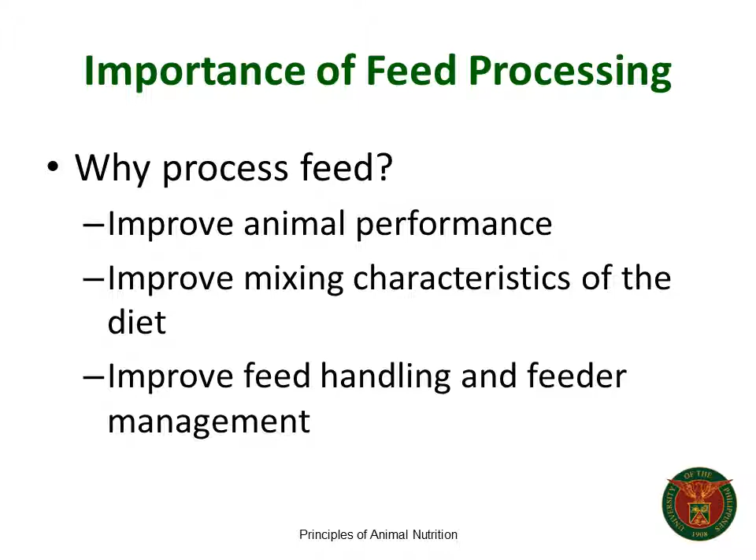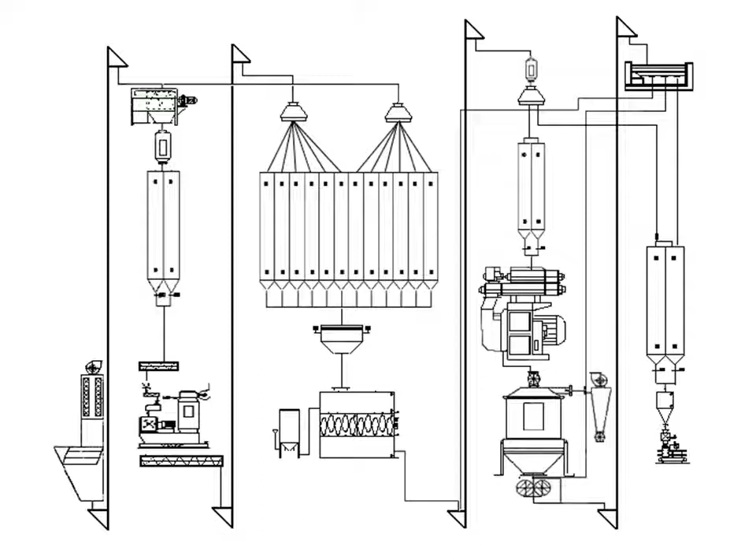In this process, from bagging, from the intake of delivered ingredients to grinding, mixing, pelleting, and bagging, we'll talk about three areas or processing methods that have the biggest impact on the quality of feed: particle size reduction, mixing, and pelleting and conditioning. So we will focus on those three matters. The first we'll talk about is particle size reduction, or grinding.

So why is it important that we reduce particle size? I mentioned it a little bit on the importance of feed processing. There are four reasons or four benefits of reducing particle size. One, it increases or improves feed digestion, or digestibility of the feed.

As I mentioned, if you use whole corn, most definitely the animal will not be able to digest the corn completely, because a big portion of the corn is within the hull. And there is only a specific amount of time that the feed will pass through the digestive tract. So there's time limitation, limitation in terms of access to digestion, and that overall will reduce feed digestibility.

Reducing the particle size, or grinding the material, the corn in this example, will increase the surface area for digestion and lead to better digestibility of nutrients. The animals can then get more energy, more amino acids, more nutrients in general from the material. The second benefit is it improves the binding ability between particles. I mentioned pelleting a while ago.

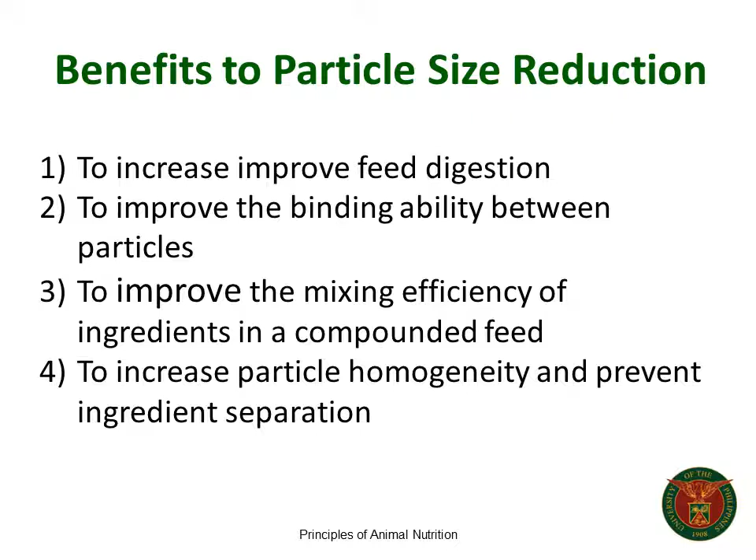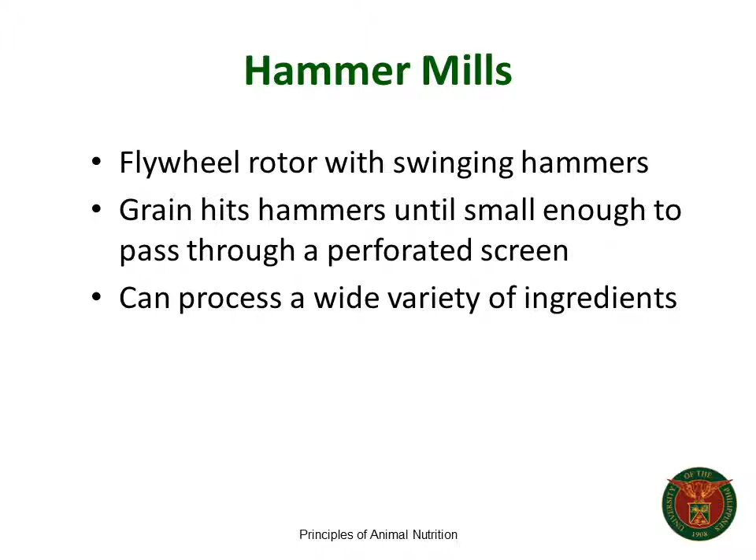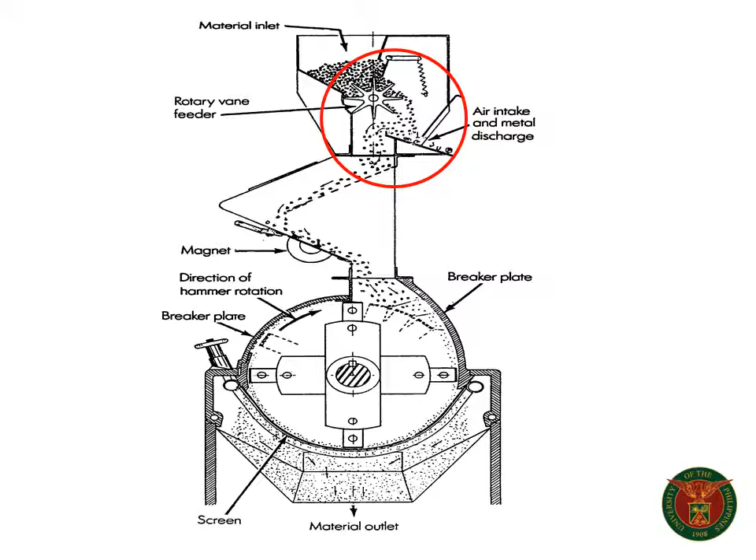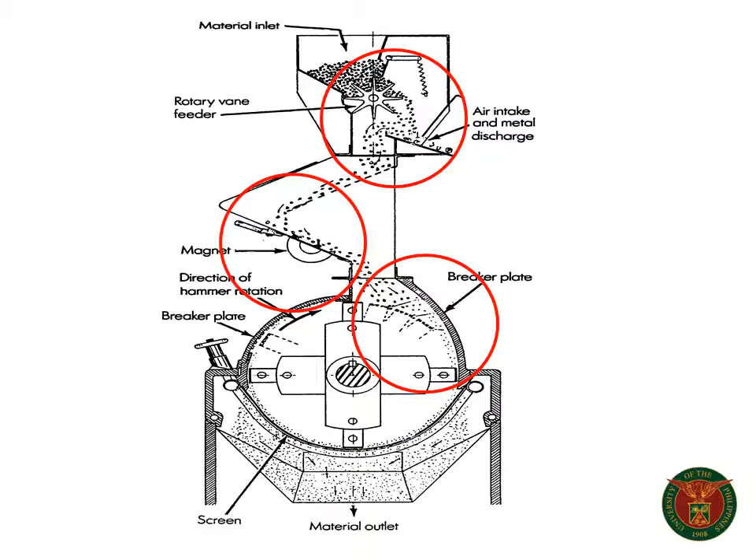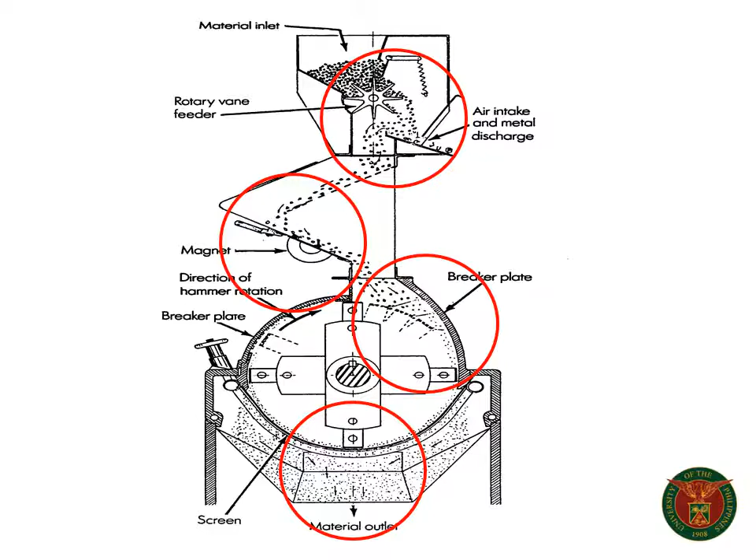In general, this is what happens: the material is placed into the inlet, comes in, and passes through the discharge. Along the line there is a magnet to prevent any metal from continuing into the grinding part of the equipment, which increases the life of the equipment. As the material comes in, the flywheel rotor is rotating and the hammers hit the material against the breaker plate, shattering it into smaller pieces. The particles flow out through the screen into the material outlet, ensuring the particles are of the correct particle size - a very basic principle.

The other type of grinding equipment is called the roller mill. Just like the hammer mill, it's named for how it grinds the material - by rolling. It's used for rolling, cracking, flaking, and steam flaking grains, and those materials are used for ruminant diets. The grain passes between two rotating cylinders, where we can adjust the distance, or roller gap, and the speed of rotation. This is how engineers control the particle size that comes out of the roller mill - the speed of the rolls determines the size and shape of the particle.

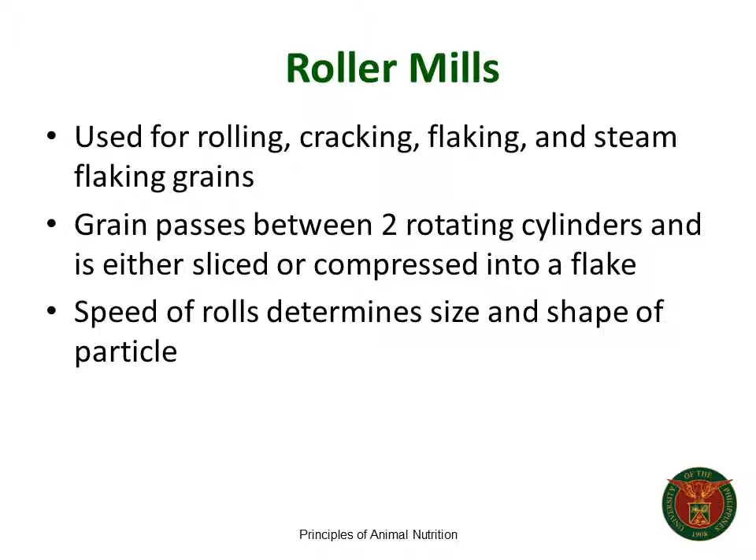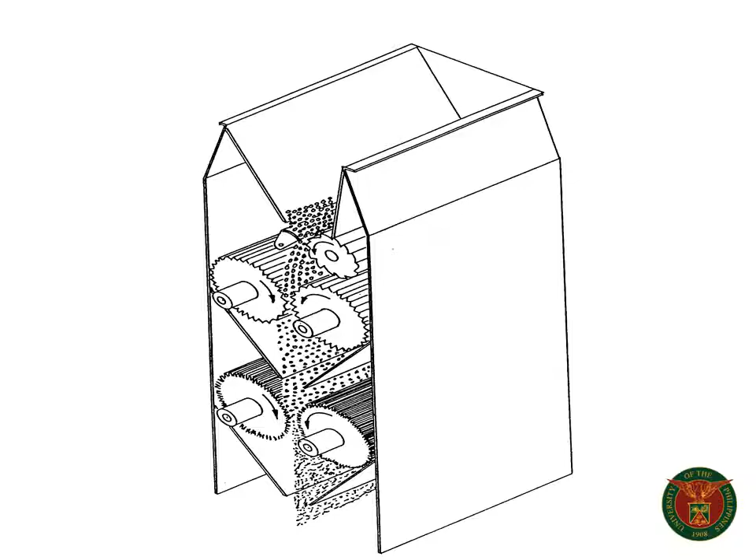One of the advantages of the roller mill is that it can grind very small particles, like sorghum, which has a very small particle size—like a mung bean in size, or even smaller. Usually when we grind sorghum in hammer mills, it's very difficult to grind, so you end up with whole grains of sorghum. But in roller mills, even the small grains can be ground easily. So that's the advantage of the roller mill versus the hammer mill—it has more flexibility in the type of ingredients that can be ground.

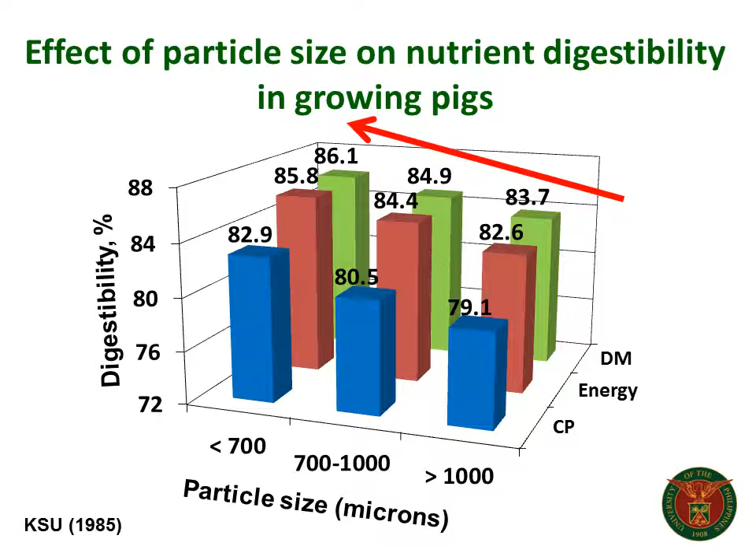The next question is, how do we check for particle size? There is a method called the particle size test, using a set of sieves with different perforated screens or sizes of perforated screens, and inside the sieves you would have agitators or dispersing agents.

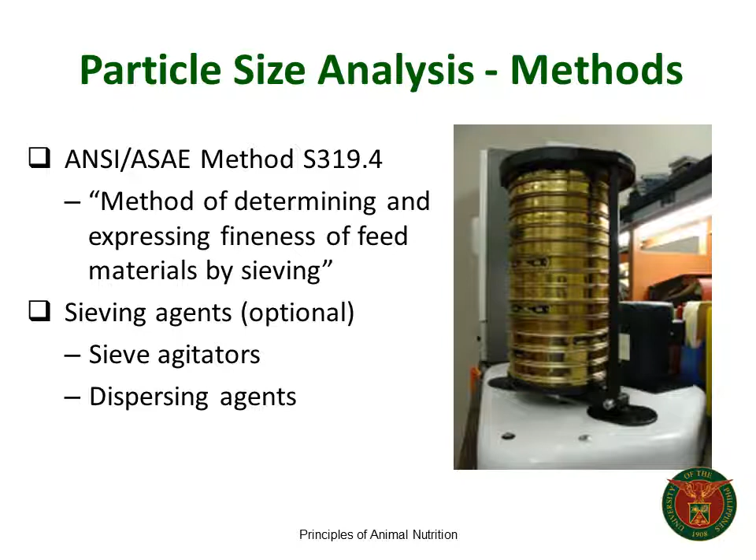This particular method is called the Rotap method, because the set of sieves are placed into a Rotap shaker, as you see in the figure. The shaker rotates the pans for 10 minutes, and on top of the pan is a part of the equipment that taps downwards, enabling the material to be tapped and flow through the set of sieves. After 10 minutes they stop the machine, take the pans, and weigh the feed or material left in each pan.

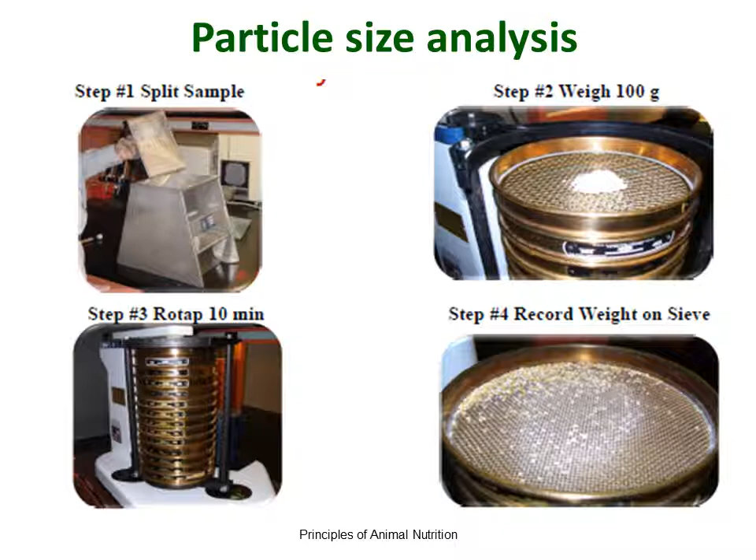So this is what I was describing: you get a sample of the ground material, put 100 grams on the top sieve, close the machine, and put it in the Rotap for 10 minutes. It rotates while being tapped on top, and at the end of 10 minutes we take the material left in each sieve and weigh it.

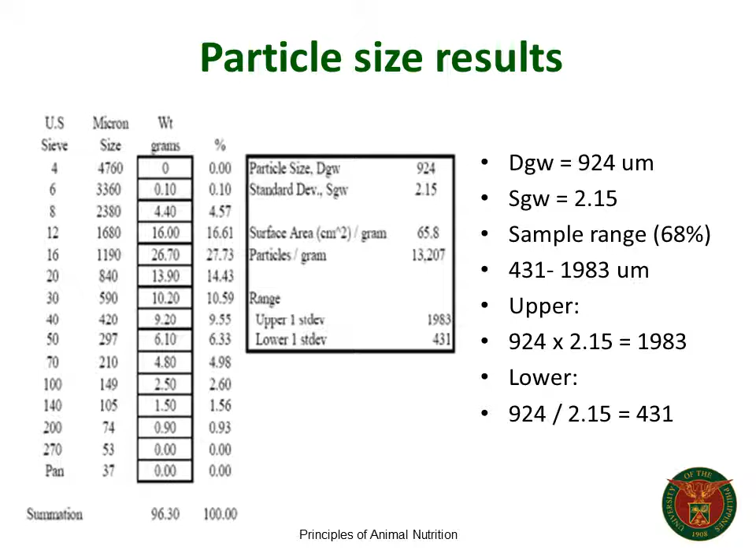And then for wheat, again, there's not a lot of data for sows, layers, and broilers, although there is some work in broilers that recommends wheat be fed to broilers or even layers as whole wheat. That is again related to gizzard size. And for growing pigs, it's between 600 to 800 microns.

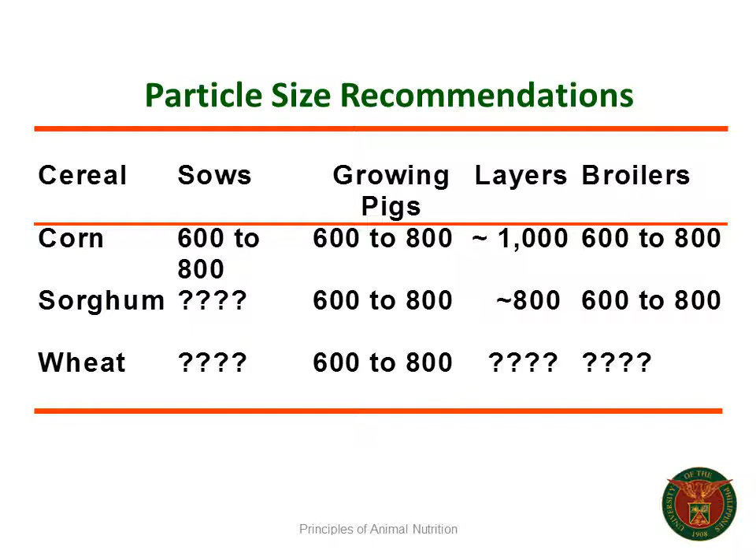So what are the benefits of a consistent particle size? One, there's less feeder bridging and plugging. Later I'll show you some pictures of what that means. In commercial farms that use automatic feeders, that would mean fewer feed lines that are plugged, because if the feed lines are plugged, feed will not flow through the lines, and the feeders at the end of the line would be empty, which can lead to out-of-feed events.

There will be fewer ulcer outbreaks in pigs. Gastric ulcers are a problem, particularly for fine ground meal. If the feed is too fine, it can lead to greater incidences of gastric ulcers. When there is a gastric ulcer, there is blood in the stomach, and the animal will actually die because of hemorrhage. When you open these pigs that have ulcers, you'll see their stomachs full of blood. Usually it's the larger pigs or the faster growing pigs in the group that will be affected.

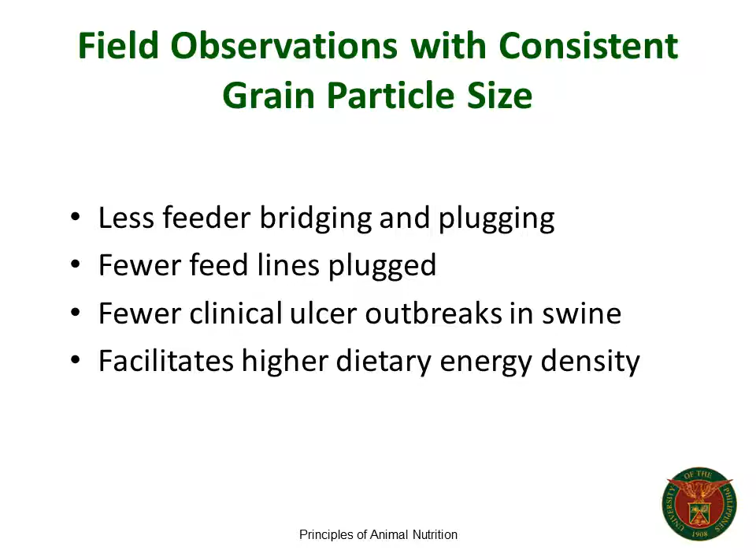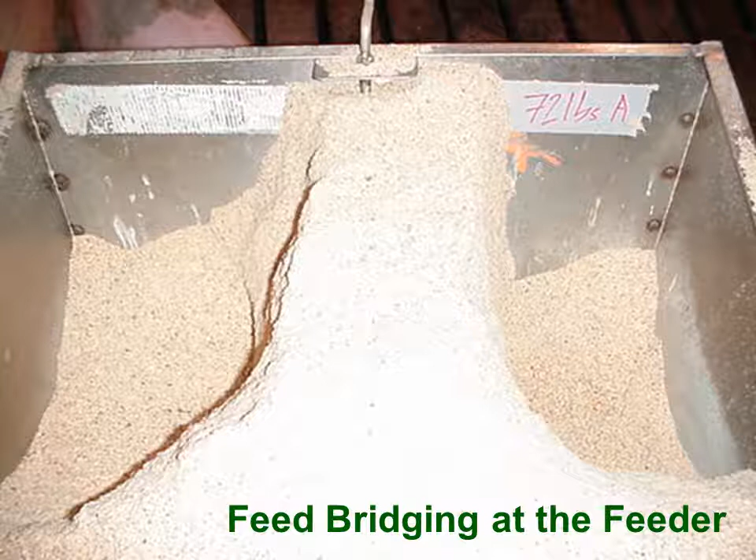Then this is a picture of feed bridging. This is already at the feeder. If the particle size is inconsistent, you see this feed bridging, and when there is feed bridging, there is ingredient separation. As you could see, in the middle there is the bridge, and usually what is left in the middle would be the fine materials, the finer ingredients, meaning the mix that comes out of the pan of the feeder is not uniform, which can have negative impacts on performance.

And then the worst part is if there is feed bridging, or plugging along the lines, then out-of-feed events can happen. By the term out of feed, it means the feeders are empty, and when the farmer finds out that it is empty, they will fix the problem, and suddenly feed will flow out of the feeders. But because pigs did not eat for quite some time, they will rush into the feeder and fight over the feed, which creates stress, and that stress leads to negative effects on performance. So welfare issues and even performance effects have been shown when there is a high incidence of out-of-feed events.

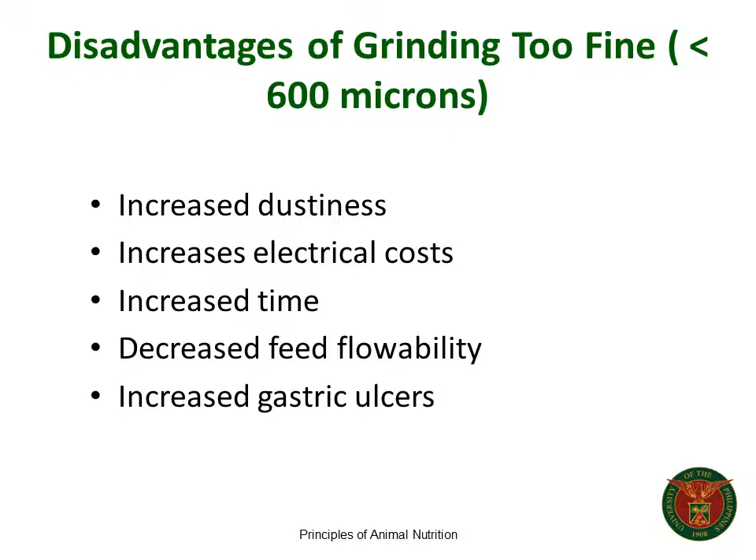What I mentioned is demonstrated by this study by Wondra in the late 1990s. On the x-axis is the particle size of the feed, from 1000 to 400 microns. And then you have energy consumption in kilowatt hour per ton on the y-axis, as well as production rate, which is tons of feed per hour of production.

As you could see, as particle size decreases from 1000 to 600 microns, energy consumption increases. And when you grind from 600 to 400 microns, you see a big increase, actually a doubling of the energy consumption, from 4 kilowatt hour per ton to 8 kilowatt hour per ton. At the same time, you see production rate at around close to 3 tons per hour.

When you grind finer, from 600 to 400 microns, you see a significant decrease in production rate, from close to 3 tons per hour to a little over 1 ton per hour. So those are the issues when we grind feed too fine.

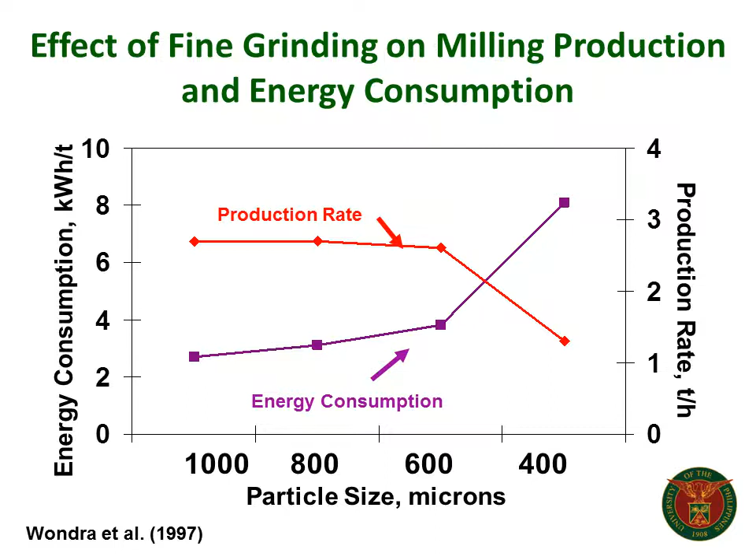Okay, so the next processing topic would be mixing. So what is our goal when we mix feed?

Here is a figure that describes the types of mixes. You have a perfect mix on the left, like a chessboard. Then you have a random mix, with no order. And then you have a segregated mix, where you have more white squares on the top than on the bottom.

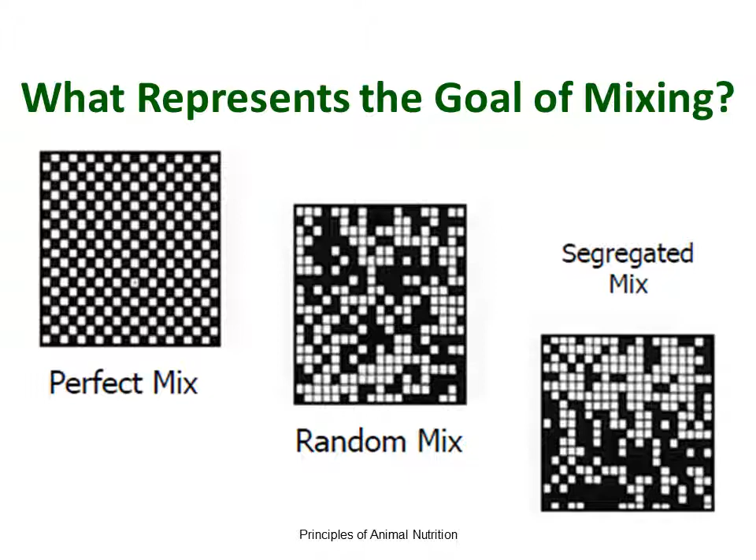So what is our goal? Our goal is to have a perfect mix. We want to get it as close to a perfect mix as possible.

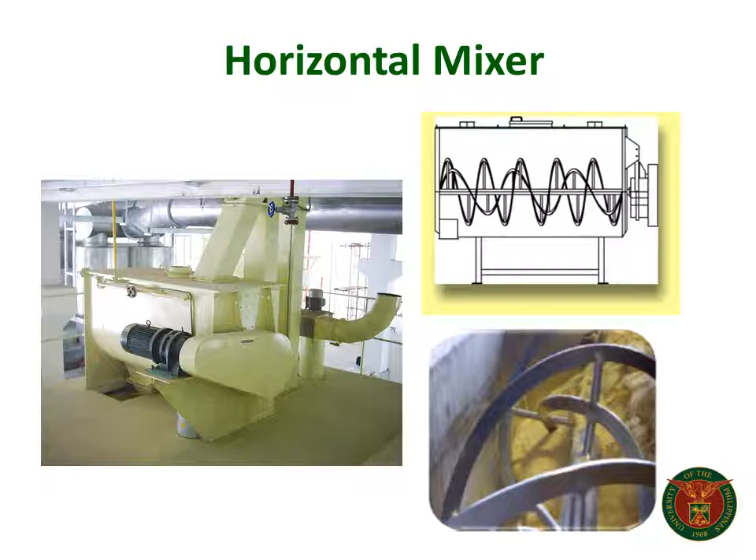There are two types of mixing equipment used in the feed industry. The most common one is called the horizontal mixer. In this figure, you see an example of a horizontal mixer. Inside that horizontal mixer is a rotor, and around the rotor are ribbons, so this is an example of a ribbon type mixer. This rotor would rotate, and that would mix the feed horizontally inside the mixer.

So what is the advantage of a horizontal mixer? Our goal is a uniform mix, and the measure of uniformity is the coefficient of variation, or CV. As you could see in this figure, you have the mixing time on the x-axis and the percent CV on the y-axis, for a double ribbon horizontal mixer.

Our goal is to get the CV of the mix to around 10%. When it's 10% and below, that's a uniform mix. For our double ribbon horizontal mixer, it takes about 2.5 minutes to get to 10% CV, which is pretty good. Then we add half a minute to 3 minutes, and that will give us a CV of around 5%.

Beyond 3 minutes, there is no further improvement in CV. This means there is no such thing as over mixing, that if you mix beyond the correct time it will go back to a higher CV - that's not true, it will just stay that way. But mixing longer takes more time and spends more electricity. That's why we mix at the appropriate mixing time.

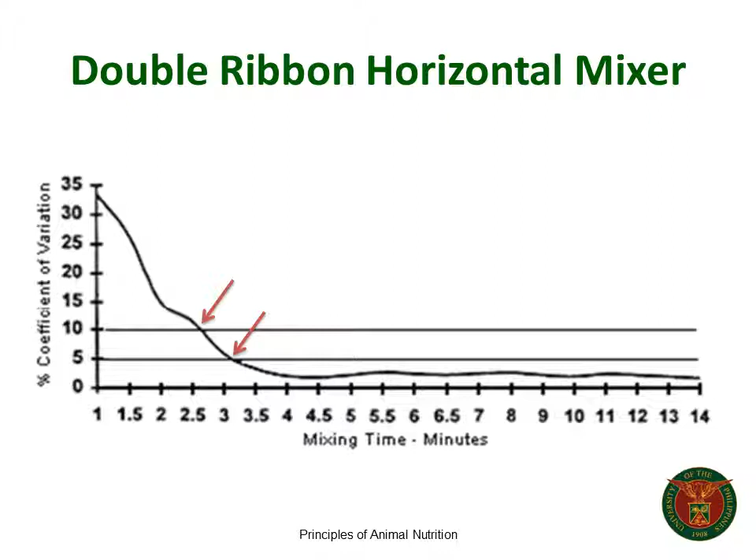The second type of mixer is the vertical mixer. Unlike the horizontal mixer, it mixes the feed vertically, which is why it's called a vertical mixer.

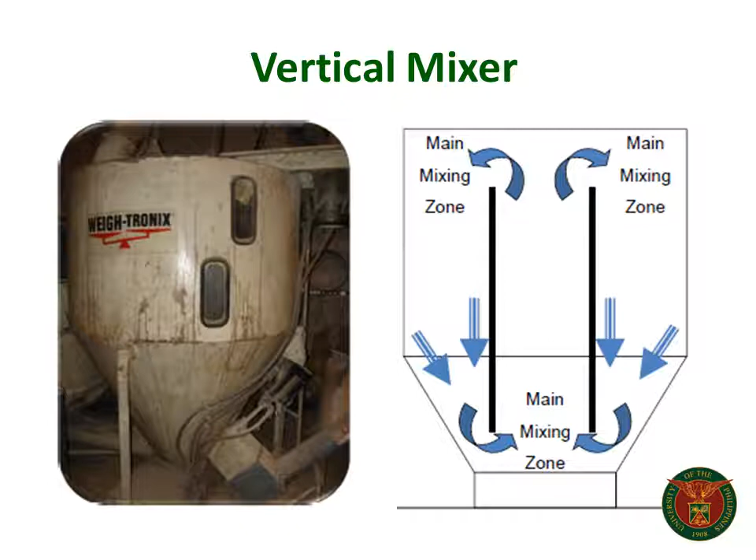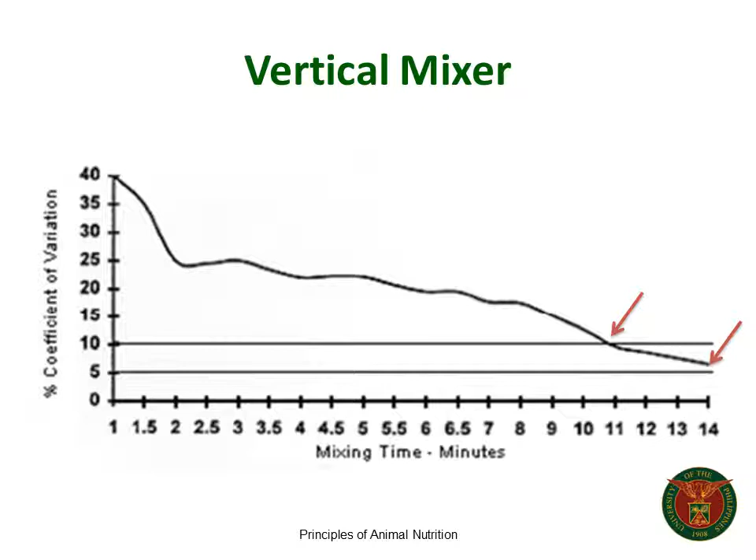There are some mixer problems to consider. One issue is liquids, which are added into the mixer through spray nozzles. If a spray nozzle is covered by feed, the liquid—usually oil, which is an energy source, or methionine—may not spray properly, affecting the quality of the diet. We have to ensure periodically that the liquid spray nozzles are not covered with material.

Another problem is material buildup in the blades. If a lot of material or feed gets stuck in the blades, that can also affect the uniformity of the mix.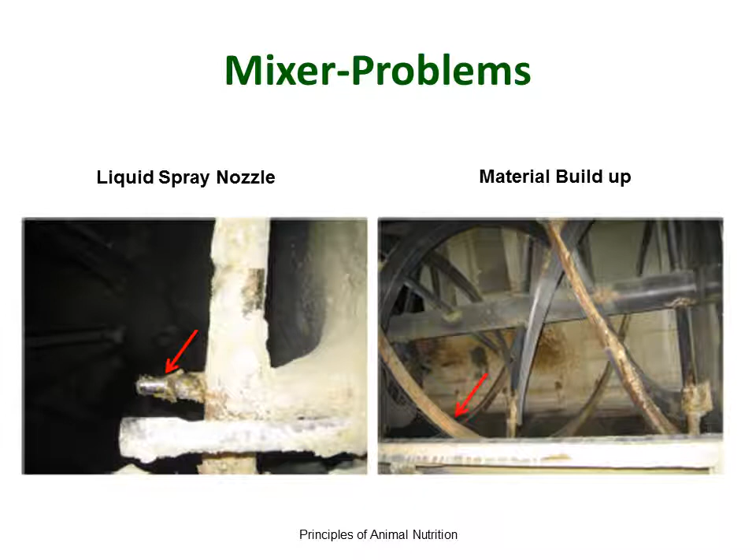Some other problems are materials building up on the ribbons, which happens when we mix liquids like oils improperly. That means if we're expecting 1,000 tons of feed, we most likely won't get the full 1,000 tons, because a significant portion is left stuck on the ribbons. This has to be cleaned periodically to prevent material buildup.

As in the picture on the right, material is left on the paddles because liquids get onto the paddles and the axle. When that happens, material gets stuck on the paddles, which prevents it from being mixed into the rest of the feed.

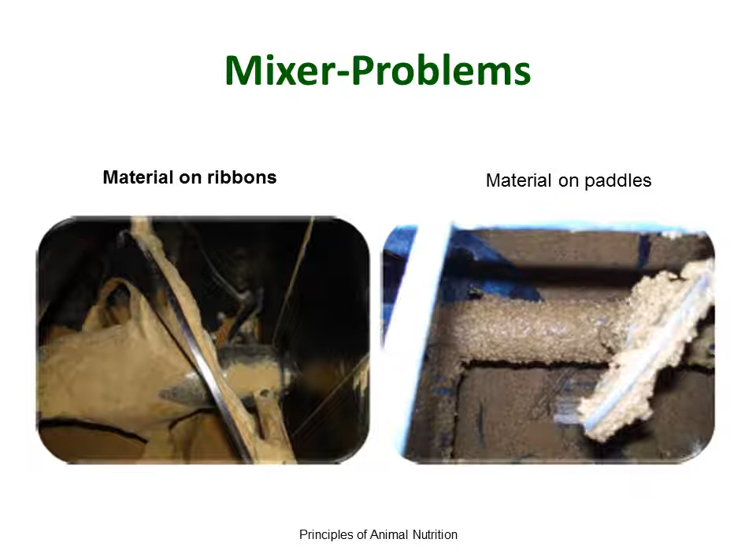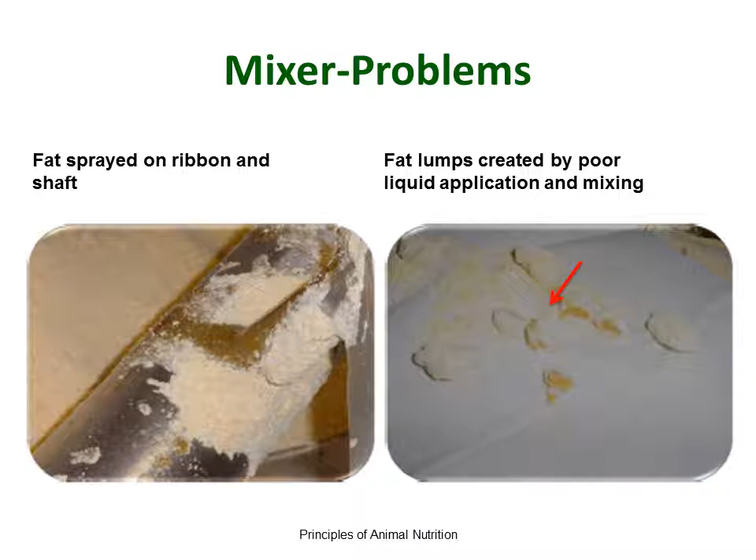Another problem is the formation of fat lumps. When you look at a mix of feed and see balls of fat, that means the fat is not properly mixed into the feed, which again affects the uniformity of the mix.

So how do we test for the uniformity of the mix? We do that through a mixer performance test, which is part of feed quality assurance. How often this is done depends on the feed mill—some do it more regularly, some every 6 months, some once a year—but obviously the more regular, the better.

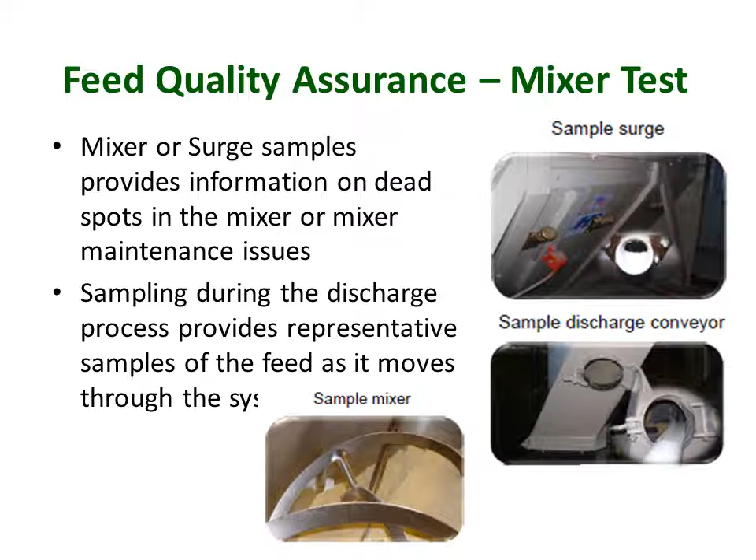To check mixer performance, they get samples of feed, usually 10 samples, either from different areas of the mixer or as feed comes out of the mixer, taking 10 samples from different bags. Those samples are then analyzed for salt or a marker.

The way they will do it is they will calculate the mixer CV. They will analyze for, let's say, salt, all the 10 samples, and then they will calculate the standard deviation, divide it by the average percent salt times 100, and they get the percent CV.

Why salt? Salt is usually selected because it's one of the micro ingredients. Its inclusion in the feed is not very high, but also not very low. So if the CV of the salt is good, then we assume that the CV of all the ingredients is also very good.

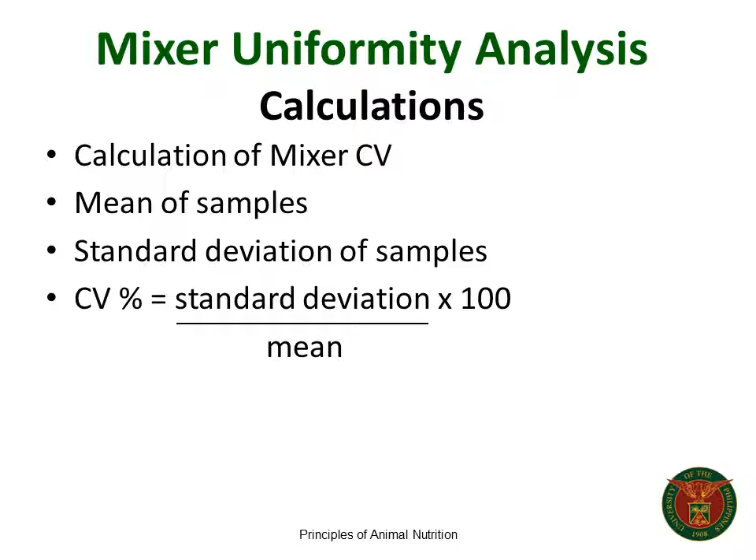So once we know the CV, we then compare it to a standard. By the way, this is an example.

Here, instead of salt, they use a marker called a Quantab, and they analyze the Quantab for the 10 samples. The reason why they use these markers is because the added salt in the feed is not the only source of salt. If you have ingredients like animal protein sources or fish meal, they can contain salt as well, and that can add to the variation. As an alternative, they use other markers like Quantab.

In this example, you see they measure the standard deviation, which is 0.02, the mean Quantab reading is 0.19, and then the CV is 9.65.

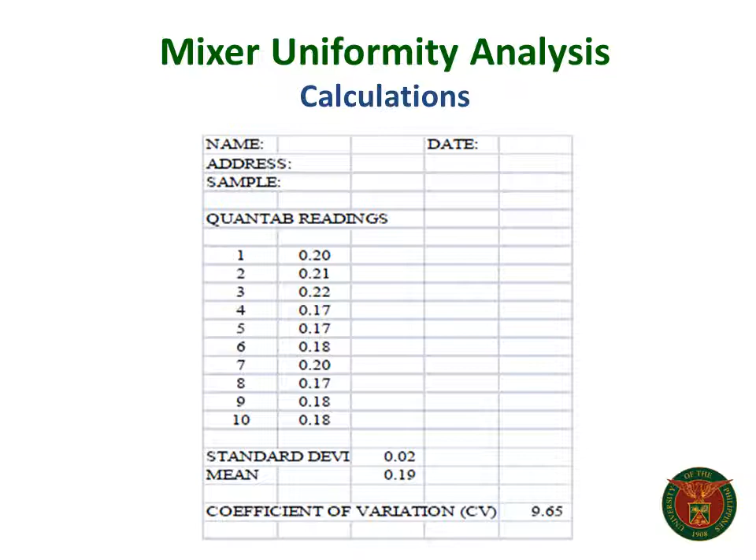So what is the standard? As I already indicated earlier, it's 10%. So 10% and below, that's excellent mixer uniformity, meaning no corrective action needs to be done. But if the CV is 10 to 15%, it is good, but that also means we need to increase mixing time by around 25 to 30%, so that hopefully that can bring down the CV to 10% and below.

If the CV is 15 to 20%, then the rating is fair, and the corrective action would be to increase mixing time by 50%. So if I'm mixing 2 minutes, then I'll mix 3 minutes. And then I'll start looking at the equipment, maybe worn equipment, maybe the blades, maybe the paddles, maybe we are overfilling the mixer.

Overfilling means putting feed above the capacity, so if it's a ton of feed, then it's putting more than a ton of feed. Another problem would be underfilling, meaning using a large mixer for a small batch of feed. The standard is it should be between 50 to 80% of the capacity of the mixer.

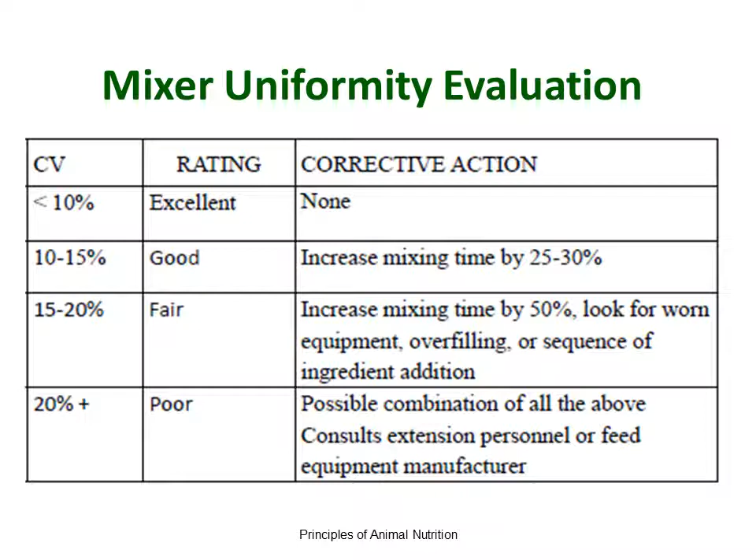The third aspect of processing we'll discuss would be conditioning and pelleting. So what is conditioning? The objective of conditioning is to improve the pelleting of the material, and we do that by including or injecting steam into the material so that moisture would be absorbed, which would then gelatinize some of the starches in the material, improving the binding ability of those pellets.

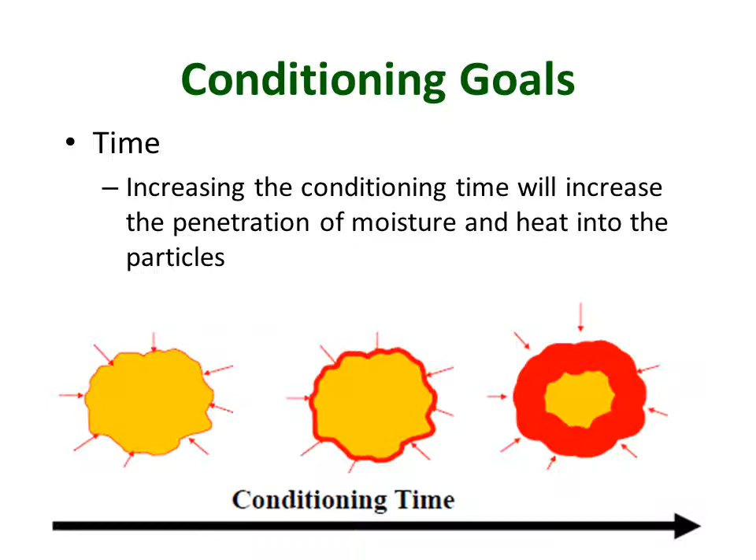The purpose of feed mash conditioning is, one, it raises the mash moisture and temperature - in a way it's a cooking process. It activates the natural adhesives found in the ingredients. It also softens the feed particles so that it will improve surface binding when it is compressed in the pellet machine.

Conditioning also increases pellet die lubrication so that the feed would easily pass through the die or the holes of the die. And then finally, because there's heat that is injected into the feed, that can also destroy some microorganisms or deactivate some anti-nutritional factors that are heat sensitive.

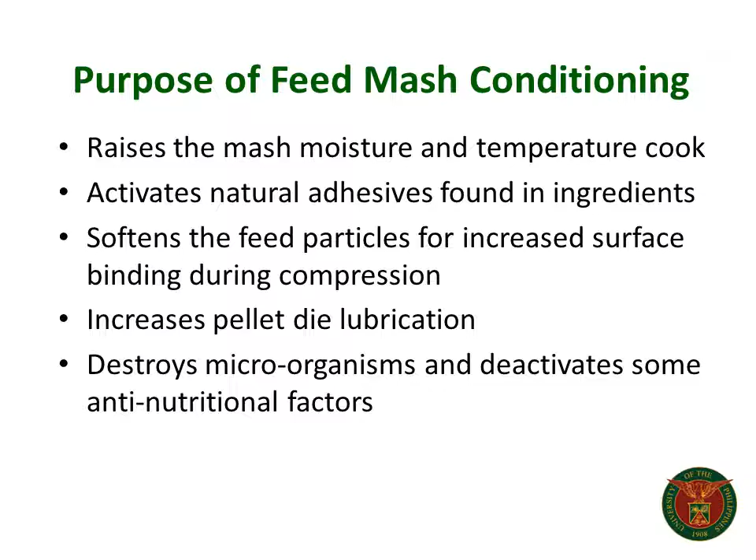So there are different types of conditioners, and the difference is mainly on the number of conditioners on top of the pellet mill. Obviously, the more conditioners, the greater the amount of conditioning time. On the left, you have a single pass conditioner where you only have one barrel. Then you have a double pass, which has two barrels. And then you have a triple pass, which has three barrels. Obviously, the triple pass would have a greater amount of time for conditioning than both a double and a single pass.

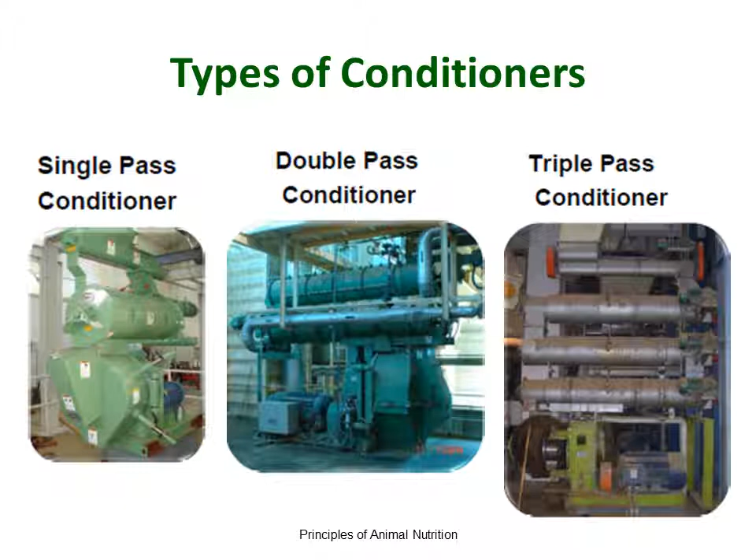So what happens is you have mash, and it enters the conditioner, and in the conditioner there's steam that's injected into the material that conditions the feed, and then it is mixed inside the conditioner so that the feed would be properly conditioned. At the end, you have conditioned mash that will enter the pellet machine. So it's higher in moisture and higher in temperature. That will make it a lot easier for the feed to pass through the pellet die, and that would improve binding ability, and you would have better, more durable pellets.

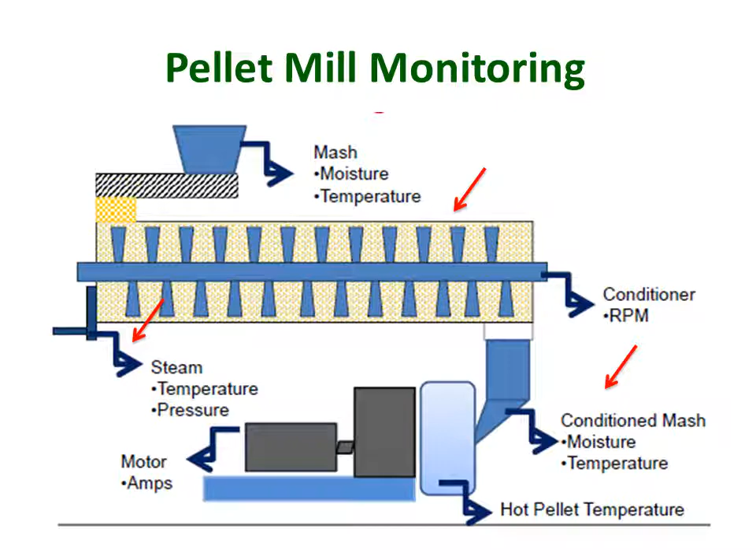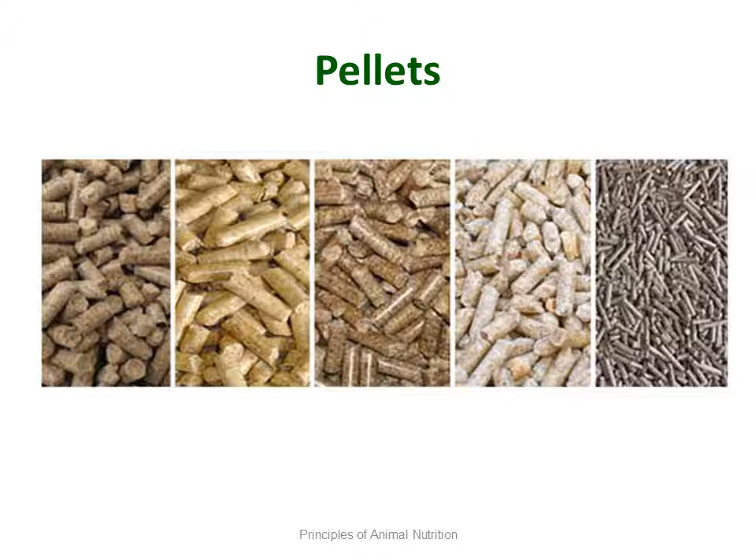So here you have a picture of pelleted feed. Pelleted feed would vary in terms of size, shape, and length. It's really dependent on the feed type. For example, for younger pigs, we give smaller pellets, and for older pigs, we give them bigger pellets. And then if you put a pellet that just came out of the pellet machine and look at it under the microscope, it looks like a cooked material. So that tells us that the pelleted feed is partially cooked.

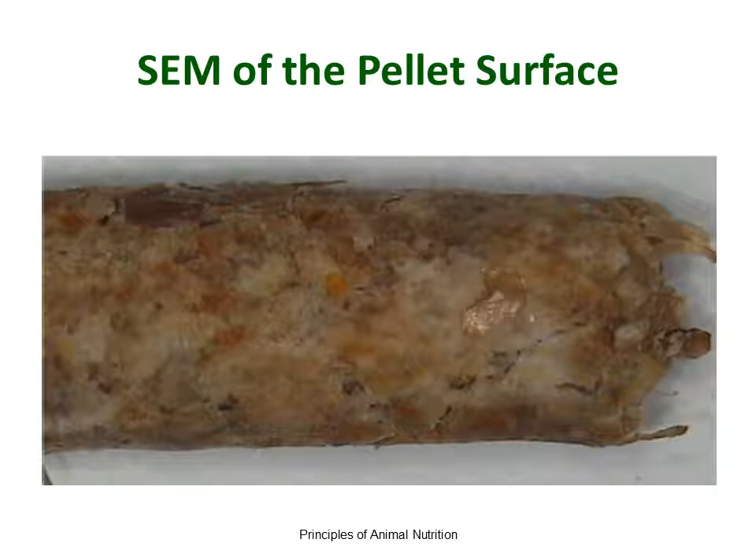So what's the benefit of pelleting? One, it improves palatability. That's why feed intake is usually higher in animals given pelleted feed, particularly in pigs, compared to those fed mash feed. There's less feed wastage, unlike mash feed - that's the biggest difference between the two. Because of the heating process, it destroys the pathogens or microorganisms.

There is less ingredient segregation because they are bound together, unlike in mash feed where they can easily segregate over time. And then it has better flowability - there's no issues with plug feeders or bridging or out of feed events. And then for a nutritionist, pelleting provides formulation flexibility because they can use more alternative ingredients. They can increase fat levels that they cannot do in mash feed.

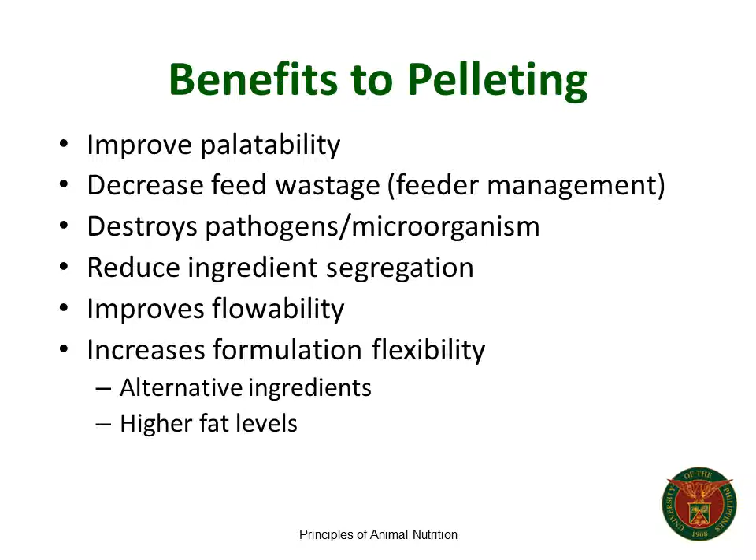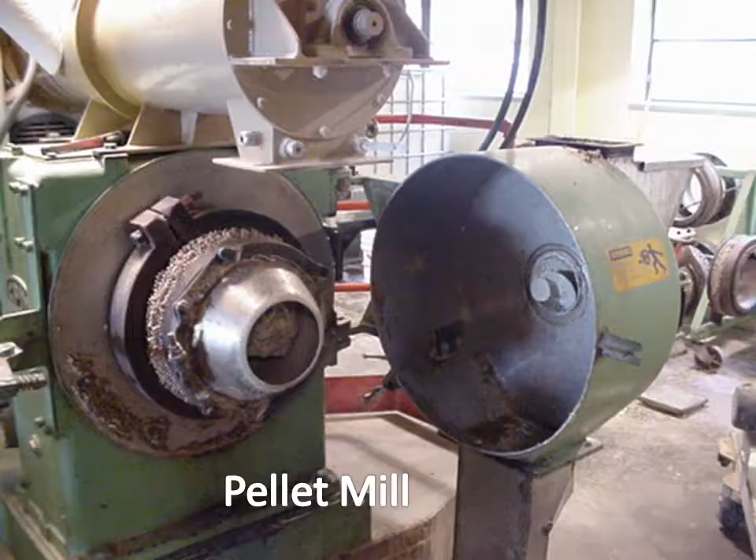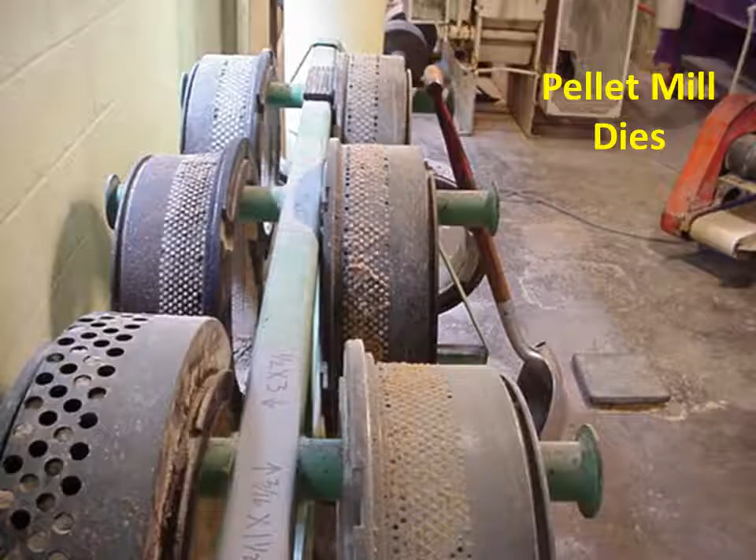So here is a picture of different pellet mill dies. You see there are pellet dies with smaller holes compared to others. Usually the bigger pellet dies are for ruminant diets. Smaller ones will be for swine or even broiler diets.

Okay, so again, what are the advantages of pellets versus mash, and the other way around, mash versus pellets? The advantage of pellets is you could reduce particle size, even smaller, less than 600 microns. You can do that, and that would actually improve pellet durability. There's higher inclusion of alternative ingredients, so you have a better choice. You could also increase the inclusion of alternative ingredients.

And the reason why that is important is because in mash feed, what farmers would do, especially in commercial feed, is they can easily look at what the ingredients are, and so they could tell if it's corn or wheat or something else. And if they see something else that they're not familiar with, then they don't use the feed or they don't buy it, and that's a problem, because the reason why we use alternative ingredients is to reduce the cost of the feed.

In pelleted diets we can do that much more than when we manufacture mash feed. The other thing we can do with pelleted feed is further include fat in the diets, unlike mash, because high inclusions of fat make mash wet. But in pelleted feed, it is much easier to increase the level of fat, and there is no issue with flowability. There's less dust, and there's an improvement in feed efficiency compared to mash.

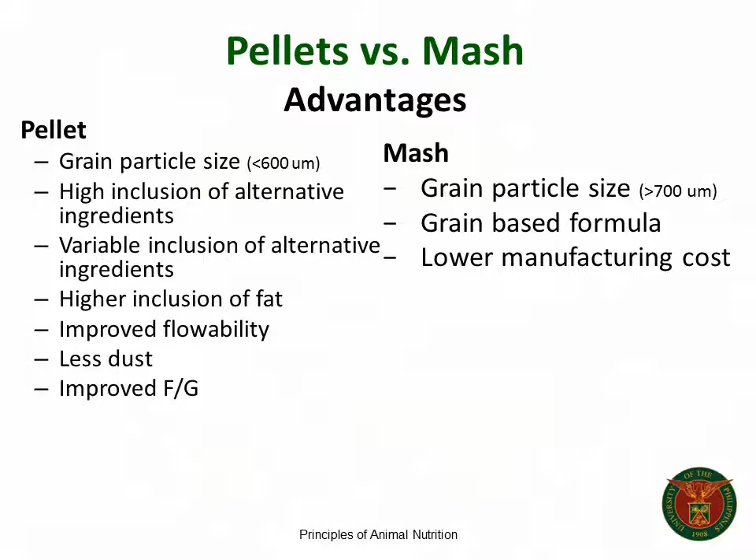If you are making pellet, there's an extra step, which means it's usually a more expensive feed than mash feed. But if you're making pellet feed, it's also important to look at pellet quality.

So pellet quality is an important issue, and there are a number of factors that affect pellet quality, from feed formulation to cooling, conditioning, the die that is used, the particle size, and the throughput of the feed mill. What you see here is the contribution, and who contributes to it, the nutritionist or the feed mill.

As you could see, the nutritionist at most has about 25 to 45% contribution, and the feed mill contributes about 55 to 75%. Which means that a bigger contributor in pellet quality would be how we process the feed.

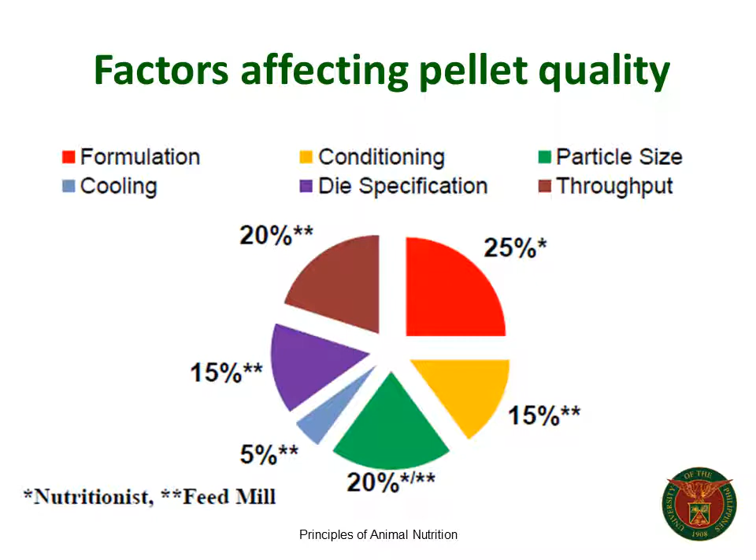This is a good study that demonstrates the importance of pellet quality. Here they fed pigs mash and pellets, and then pellets with 20, 40, and 60% fines. Fines are the ground pellets.

What we see is, if we have good pellets, then we see the improvement in feed efficiency. That's a fairly good improvement in feed conversion ratio. But if our pellets are of poor quality, as low as 20% fines, we see that the feed efficiency is just the same as the meal-fed diets. So we lose the benefit of pelleting. This demonstrates the importance of making sure that we produce good quality pellets.

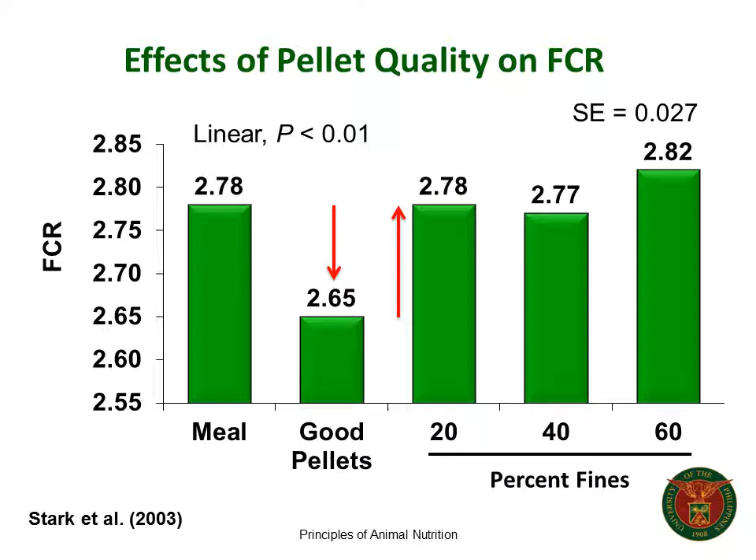So how do we test for pellet quality? What we do is a pellet durability test, called the tumbler or tumbling test, or PDI test.

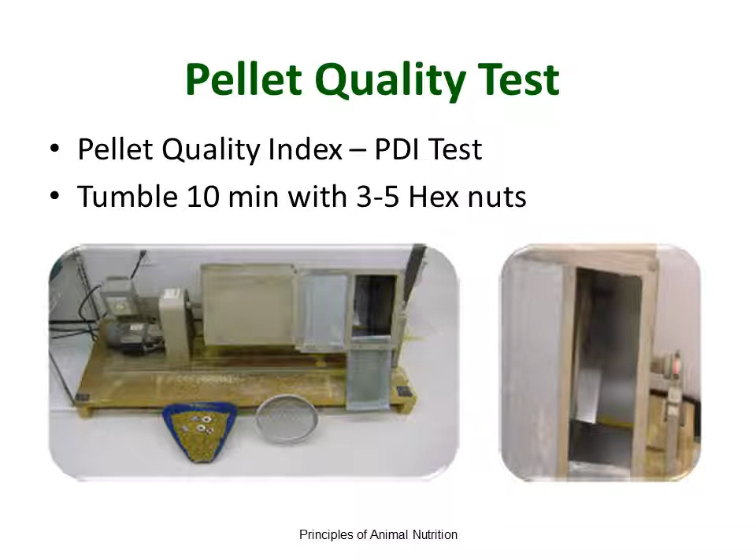You put a certain amount of feed into the tumbler, and tumble it for 10 minutes, and increase the agitation by putting some hex nuts, about 3 to 5 hex nuts, inside the tumbler, and it will tumble within. After tumbling, you get the feed, separate the whole pellets, and then divide the pellets over the initial weight of the feed.

This is the PDI procedure: you get the sample, remove the fines, weigh about half a kilogram, put it in the tumbler for 10 minutes. After tumbling, you separate the whole pellets by screen, and weigh them. The PDI is calculated as the weight of the pellet after tumbling over the weight of pellets before tumbling.

The standard is to get it as high as probably 95% and above. Different feed mills would have different standards, and it will also depend on the feed type, but usually 95% will be good enough as pellet durability.

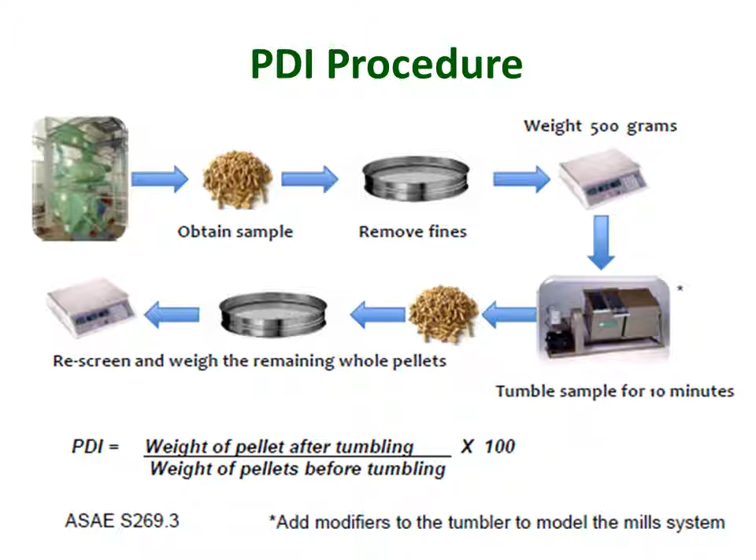So we have two additional steps that we'll talk about, and these are some of the recent developments in feed processing: the processes called expanding and extruding.

First, the expanders. Expanders are something like conditioners, except that there is greater pressure applied into the feed. So there's high pressure and more conditioning, which allows us to improve the gelatinization of the feed. If pelleting temperatures would be somewhere between 70 to probably around 80 degrees Celsius, expander temperatures would be a little bit over 100 degrees Celsius.

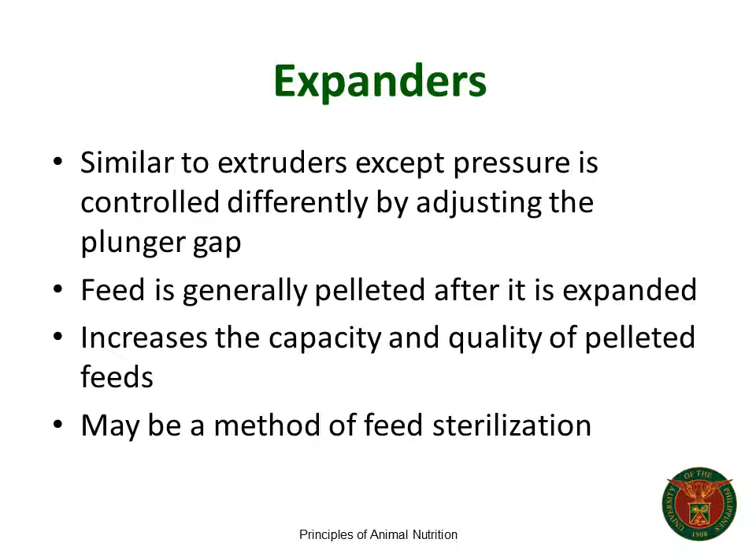That is the reason why it is a good method for feed sterilization. For countries that have very strict rules on feed safety, they would apply or put an expander on top of the pelleting machine, so that will sterilize the feed and ensure better protection against potential pathogens.

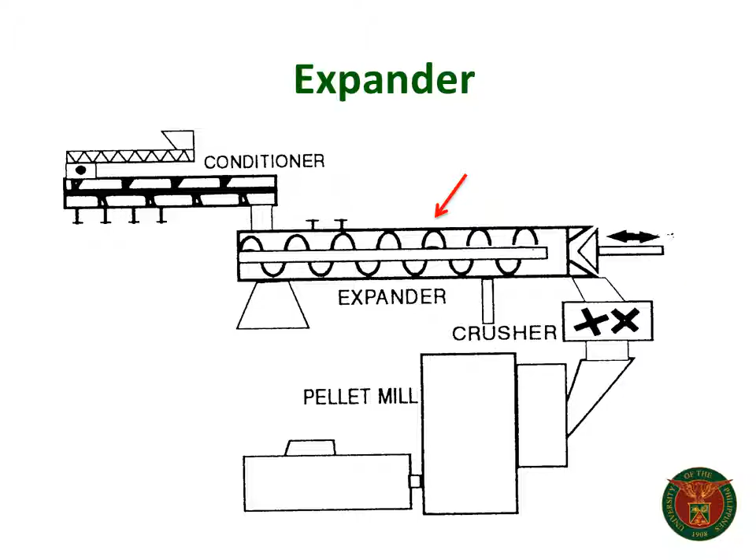So there are some suggestions when we expand feed. The first is piglet feed is not expanded, and the reason is because many of the specialty ingredients are negatively affected when they expand them, like specialty protein sources. So protein digestibility decreases, and the stability of some vitamins are also affected because they are subjected to very high temperatures.

So piglet diets we don't expand, and today expanders are more often used in poultry diets than in swine. And that is because of feed safety issues. Salmonella is a major issue in poultry, not so much in swine, and the use of expanders plays a very important role in ensuring sterilization of the feed against salmonella.

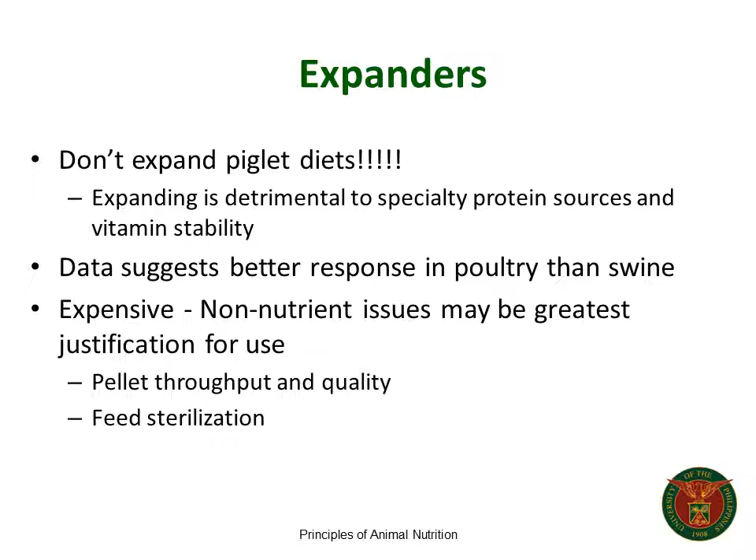Then the last would be extrusion processing. Again, it is a heat treatment applied to the feed, and compared to both the pelleting process and the expansion process, the extrusion process has higher temperatures, about 135 degrees Celsius, and a lot more pressure that's added into the feed, and that's why they expand and form different shapes.

So there's air that's pressed into the material, which shears, gelatinizes, and changes the structure of nutrients. As they exit the extruder, they expand because there is less pressure on the outside environment than inside the extruder. That's why you can create material like cheese puffs, breakfast cereals, pet food—those are all extruded feed. If you notice, they are lighter and fluffy, and that is because of this phenomenon.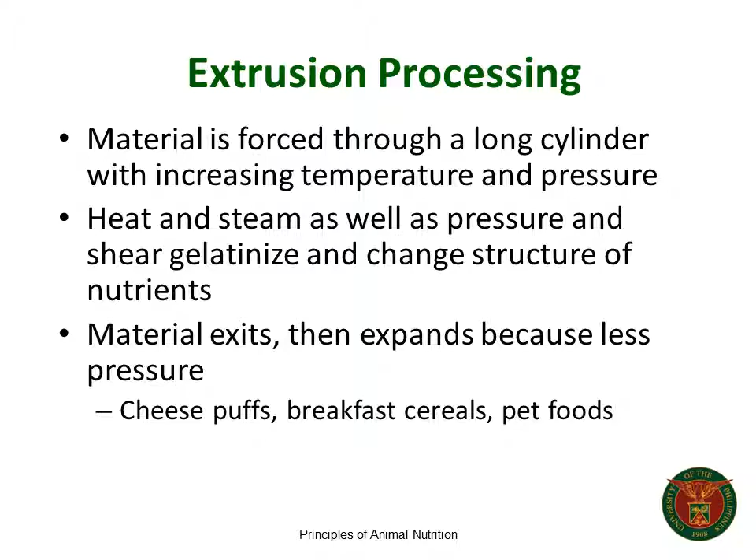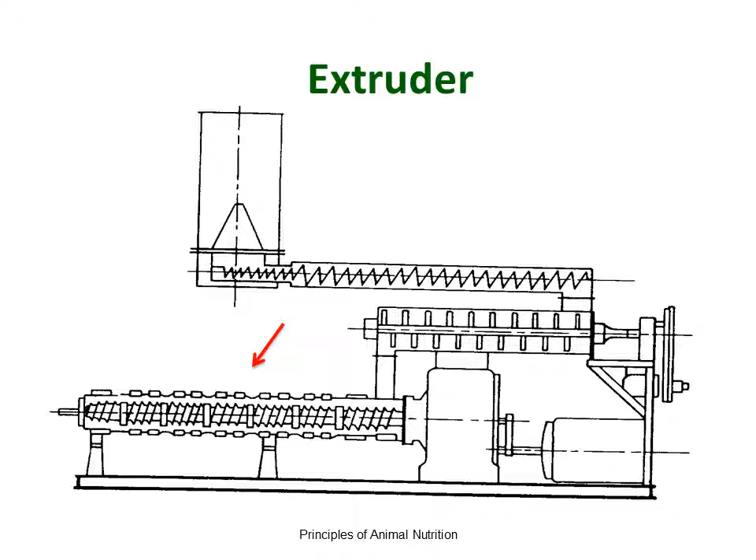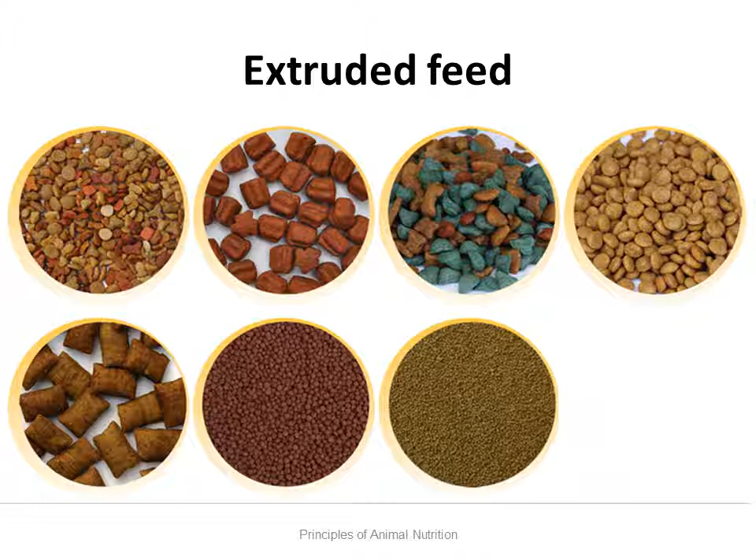So here is a picture of different types of feed that's extruded. Majority of the ones you see on top are pet food—if you have pets and buy pet food, I'm sure you've seen extruded feed. At the bottom, there's fish feed. Those are also extruded feed because some species require floaters or floating feed so that farmers can easily see if the fish are eating, since some of these species are surface eaters. Then some extrude feed so that it will be slow sinkers, so it doesn't just simply sink to the bottom. So those are the reasons why extruders are used in the feed industry, most often for the pet food industry as well as the aquaculture industry.

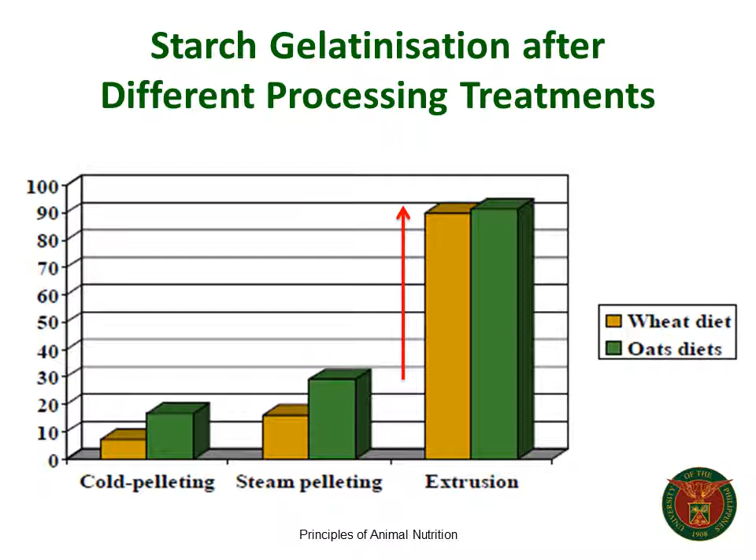So again, the benefit of extrusion compared to pelleting is it increases starch gelatinization. This is true for both wheat diets and oat diets in this study. And here, this is starch digestibility in broilers—with extrusion, they saw a significant increase in starch digestibility for the wheat diets.

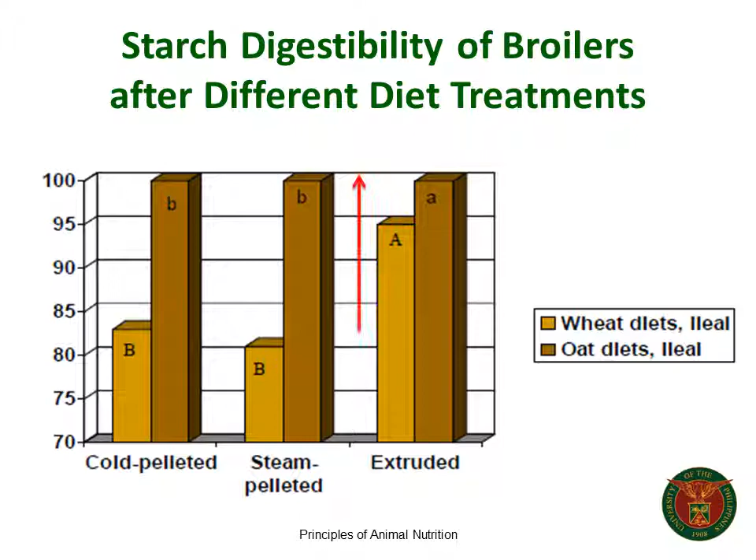Okay, so that's the end of our discussion on feed processing. Hopefully by now you know why feed is processed, and you've learned the different types of processing equipment for grinding, mixing, and heat treatment processes like conditioning, pelleting, expanding, and extruding. Hopefully you understand the importance of particle size reduction, and can now differentiate between pelleting, extrusion, and expansion. With that, thank you very much, and I wish you all the best in your exam on Wednesday. Thank you.